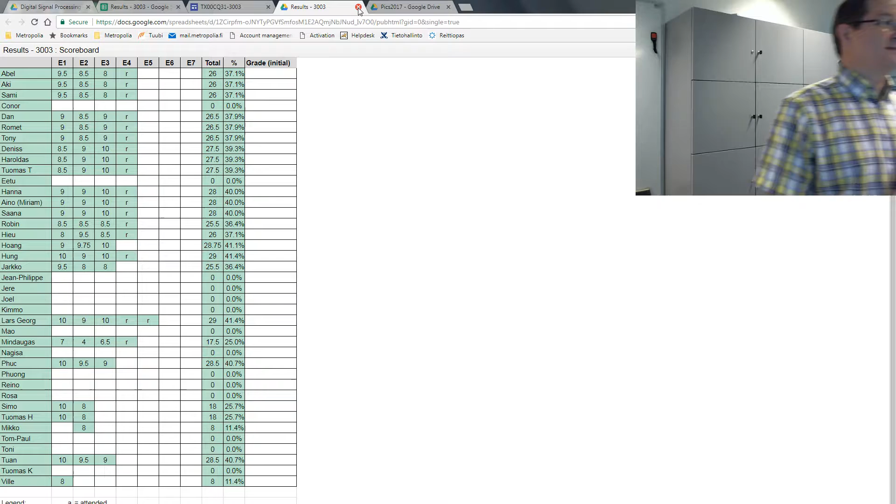Okay, but anyway, back to the business. So control, but before that, let's go through this stuff on the whiteboard. There we go. So what to remember from signals? This is basically kind of review.

Signals. The most important part to remember from signals is that we handle sampled data sets. We have x of t, a continuous time system, and when we sample it, we take the sample such that we have index n, which is just a running number or index, times sample time, which is also 1 over the sample rate.

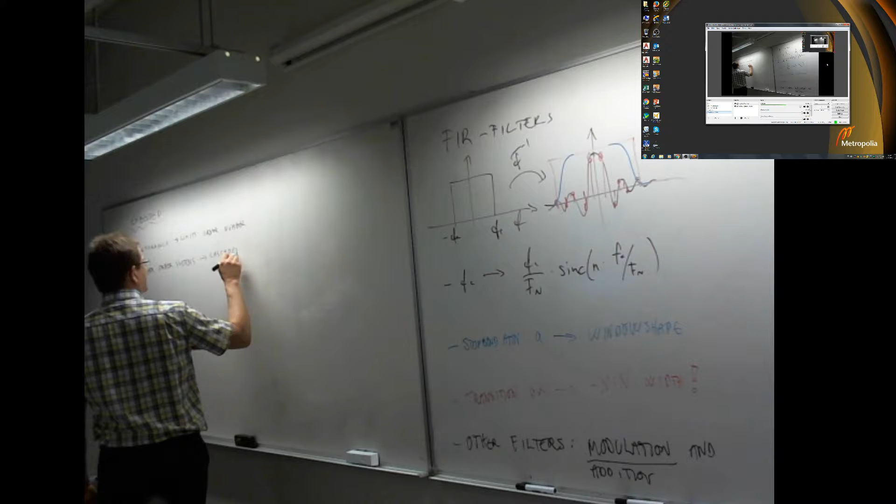And then the calculation inaccuracy actually practically means that the higher order systems are always divided into second order sections. So meaning those will go to cascaded second order sections to actually have good computing accuracy even with limited number of bits.

Okay. And now we can go into, with this quick review, we can go into today's topic. Not that one. It's a system control.

Ooh. Yeah. Yes, it's nice. And it's very expensive. And even more expensive to actually keep it in good condition. It just needed new discs, brake discs on the front, of course, then the brake pads, and then also now it doesn't have any lambda sensor anymore. Who needs lambda? Which means that it's a little bit tuned up. At the same time, it's a lot of fun now, and very expensive to keep in running condition.

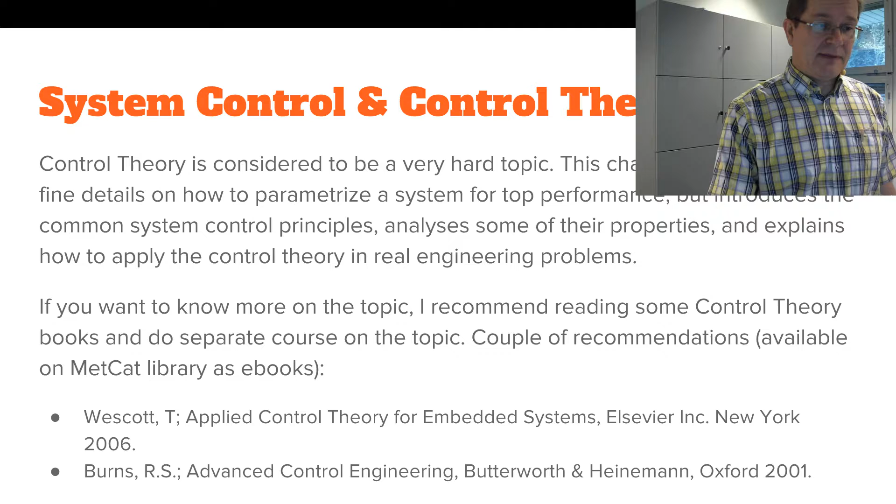And there are actually a couple of good books I found. Wescott, Applied Control Theory for Embedded Systems - yes, it's applied, very close to the book that I would write if I wrote one. It has a very practical point of view, with real life examples, sort of. And the other one is a good review of control engineering overall.

So basically, in control theory or control systems, we have two sorts of control. One is open loop - for example, I wish the temperature in the classroom was set, but I would have no other recourse than that big wish there.

No feedback of measuring the temperature or anything, just sending a command, okay, now do that. The same way, do you have feedback on your system when you're trying to control the speed? That's why it fails. If you don't have any feedback from the system, if you're not measuring speed or position or something like that, you don't know how the system is behaving when you're sending a command.

And yes, very limited control. But anyways, a classic example is an electric block heater for a car, which is just a timer, or actually just a heater element, and you time it externally with your block heater outlet. And then you can also burn your car with that, practically.

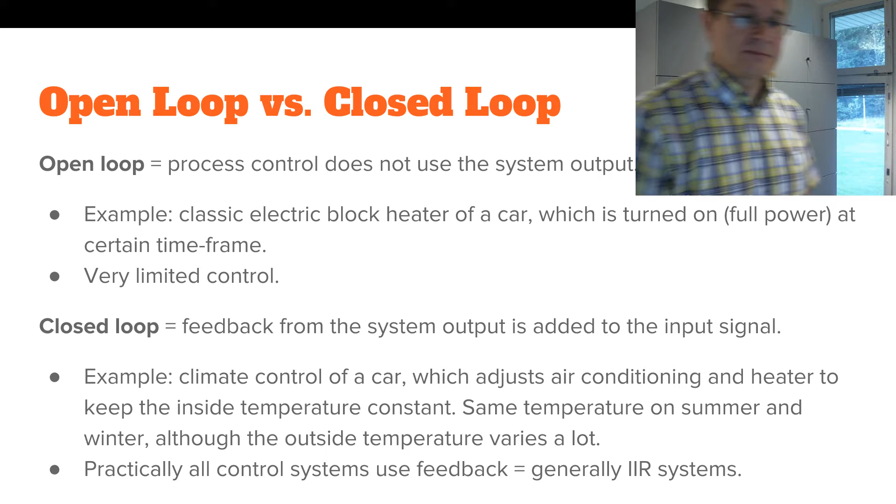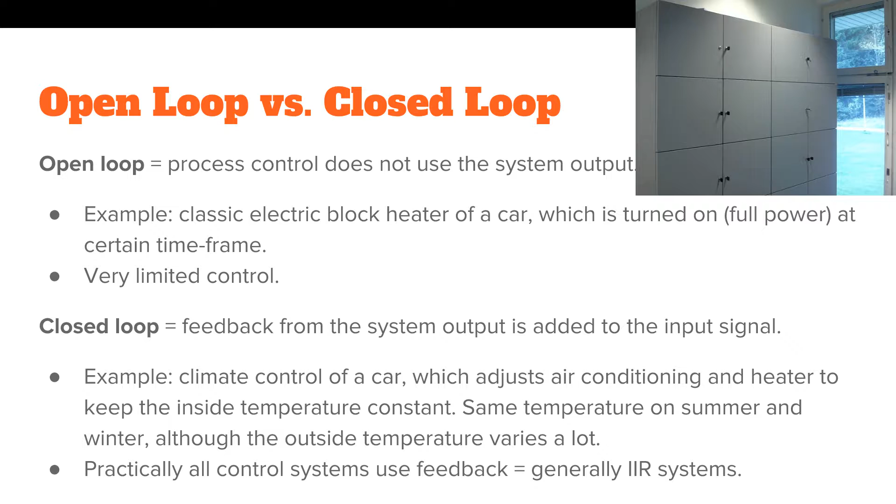Closed loop controllers are the ones which have some sort of feedback - they measure the outcome and try to adjust the system such that it actually gets there. So all control systems which use feedback, or practically all do, are generally IIR systems. If you add a thermostat to the electric block heater, then it becomes a closed loop system - it has feedback, cutting off the power before your engine block water starts boiling.

All right, and that's what a generic... just a moment, I need to check that everything is going to the tube as I wish. Yes, they are. So that's how any closed loop control system would look like.

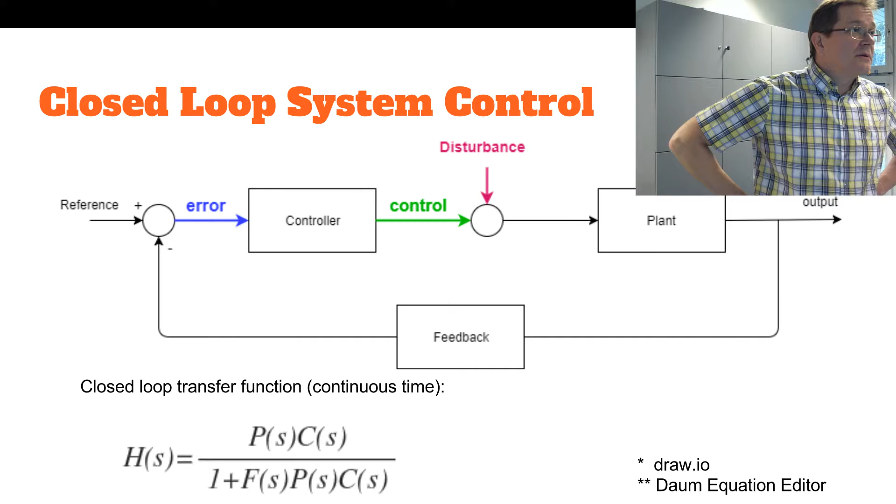So the controller is the one that you would be designing to match the requirements. The plant here, that's an old term from the era of steam power, actually. The term is actually from steam power control.

Those are, by the way, just magnificent things - how they stopped the steam power plants from exploding. That was a small problem at the beginning of steam engines - you could overheat the steam plant and it explodes with a big bang. But anyway, the things done to prevent that kind of disaster, those are just wonderful machines.

So, anyway, we have a controller which has the control signal going to the plant. The reference is actually the value that you would set - so the system should set to that value, meaning, for example, 21 degrees. Then you have a controller whose output somehow directly drives the plant, so it's the signal to the plant.

And in between the control and plant, there is a disturbance signal, meaning that if you have some external effects, they would be calculated as the disturbance to the control signal. Those disturbances are usually inside the plant, but this is how we model it.

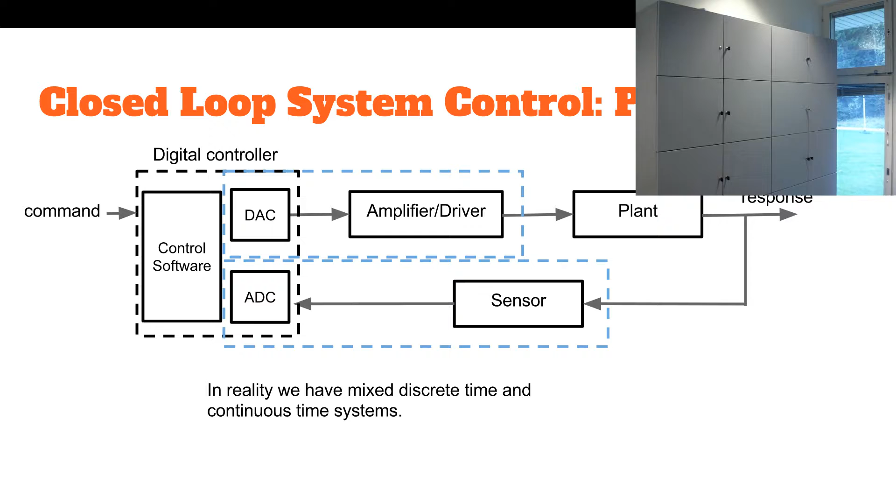So that's fundamentally how it looks like. Some of these are analog systems or continuous time systems, some of these - well, the control - is a discrete time system, and there are some considerations. For example, simply that if you have very rapid changes on the response, you need to sample it fast enough.

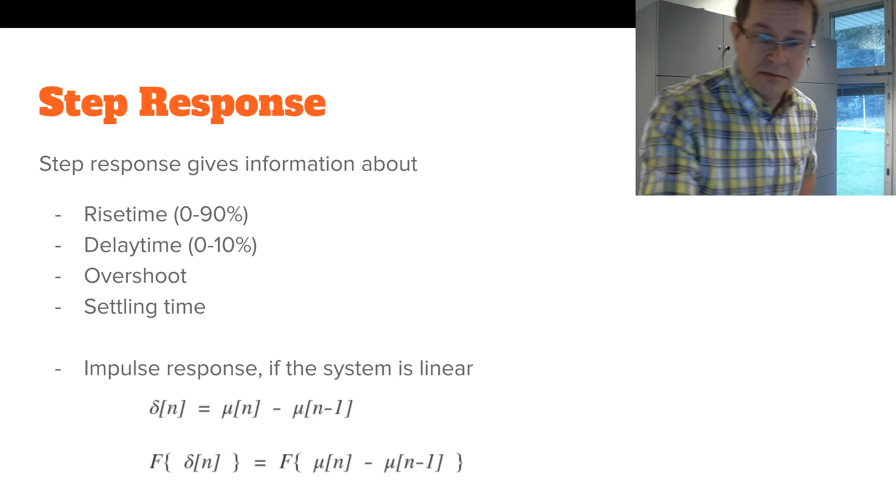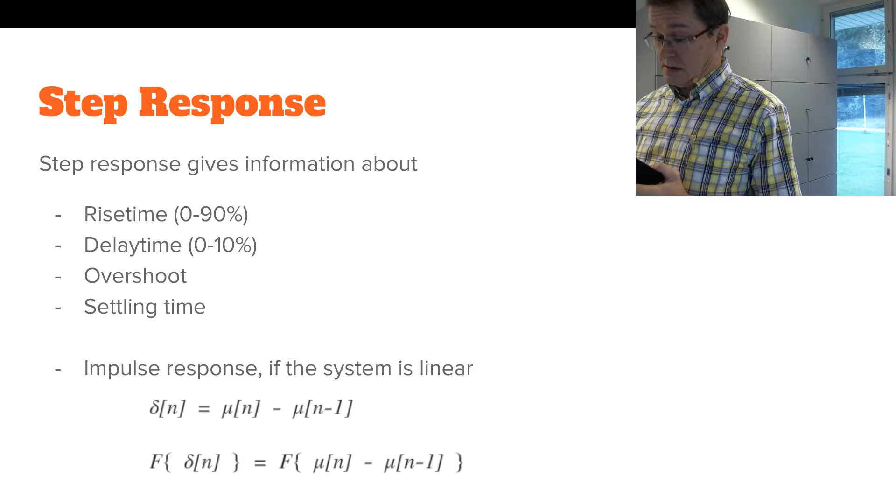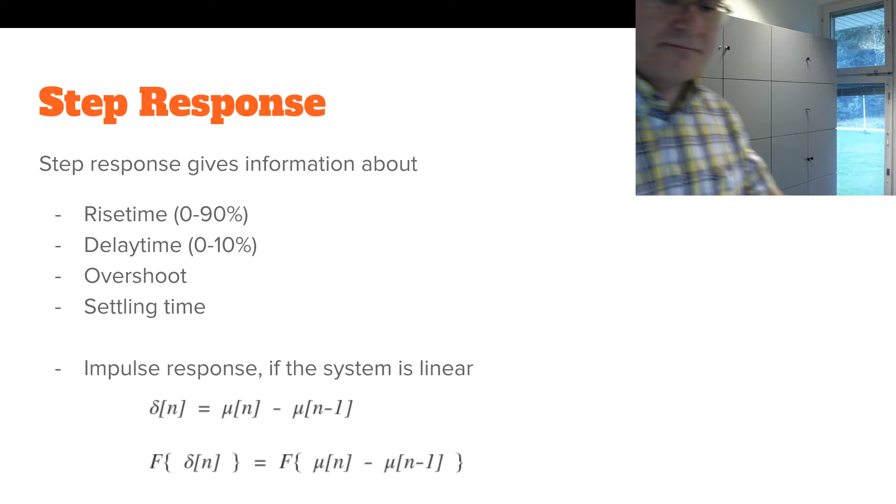Some tools. So we have the first tool, called step response. Just a moment, I'll check which pictures I have. I have that one already, so I don't have the embedded one. The step response is used with controlled systems to find out if a system actually behaves nicely.

Meaning that whatever the system is, you would just send it into the system transfer function and check what is the output. And basically from the output there are some parameters. Generally the output would look like something like that, where let me mark some important parts - the system DC gain.

The DC gain is actually the value where this one settles to. DC, meaning no changes at all anymore. So basically at here and beyond, this would have been settled. This defines the DC gain, when you wait long enough for that one to settle.

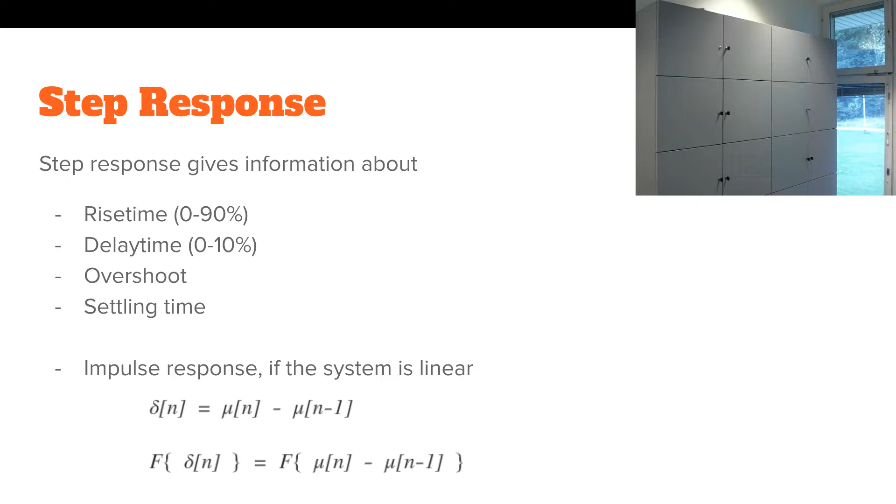Another one - this is probably something that makes hair stand up. Final value theorem. That requires some calculus when you do it by hand. Yes, it does. But anyways, basically this is the fine way of calculating the DC gain of the system.

The final value theorem tells you that you don't need to wait for infinite time to calculate the last value of the system. You can derive it from the Z transform of the signal, meaning the transfer function of the system, the control system loop transfer function. You multiply that transfer function with Z minus 1 divided by Z, and then multiply it by the step function. Then you get the final value simply by checking what is the value of the transfer function when Z equals 1.

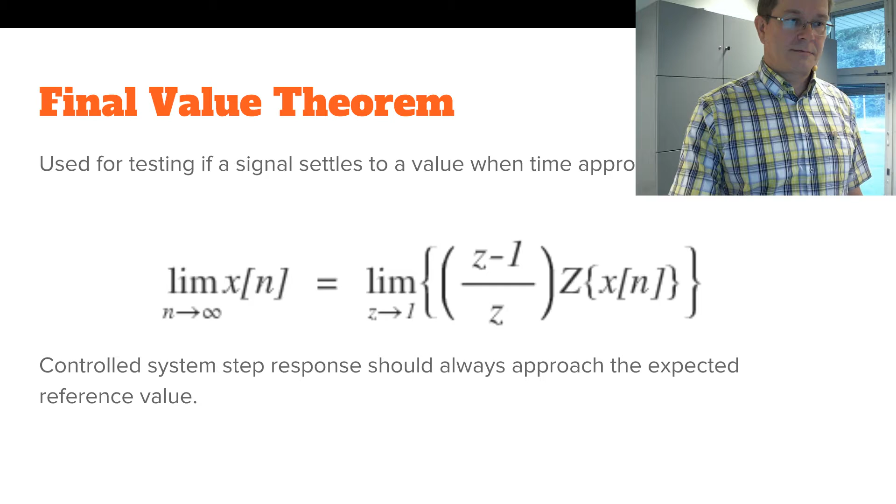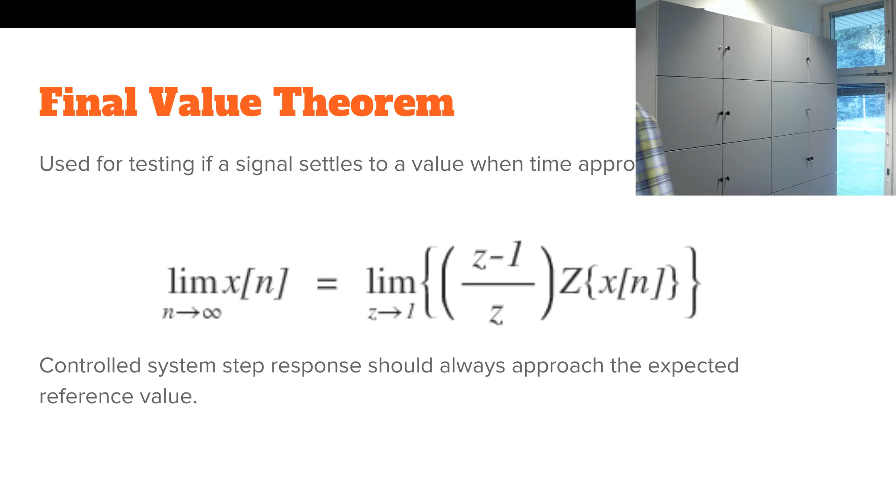There was also a notification that controlled system step response should always approach the expected reference value. Otherwise it doesn't control.

Then you might end up playing with the blocks. We already had this with the filters. If you have two parallel blocks, the system transfer function for parallel blocks is just the sum of the transfer functions. On cascaded systems, that was the way we did this. Second order section division, we had cascaded second order systems that gives exactly the same transfer function as the original. That's how you calculate those.

This is a little bit, well, it's not that hard either. On this analysis of systems, sometimes you need to change the order of summation on the block diagram. So, how to move the plus block.

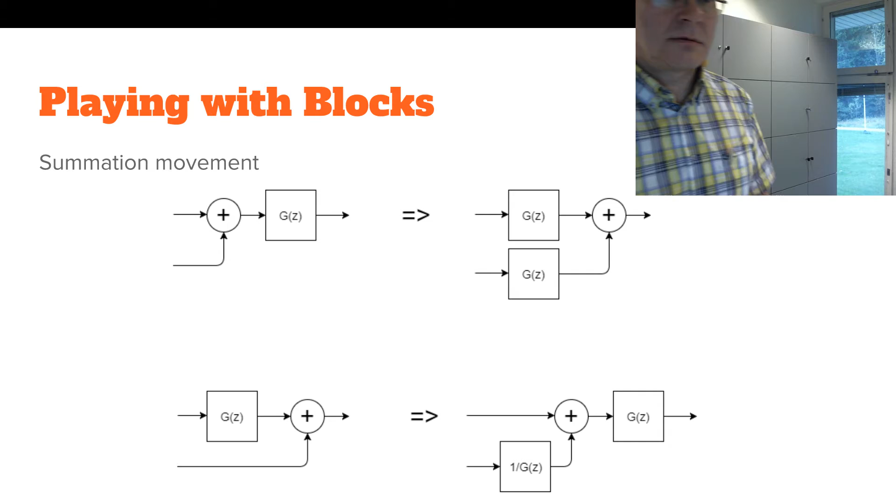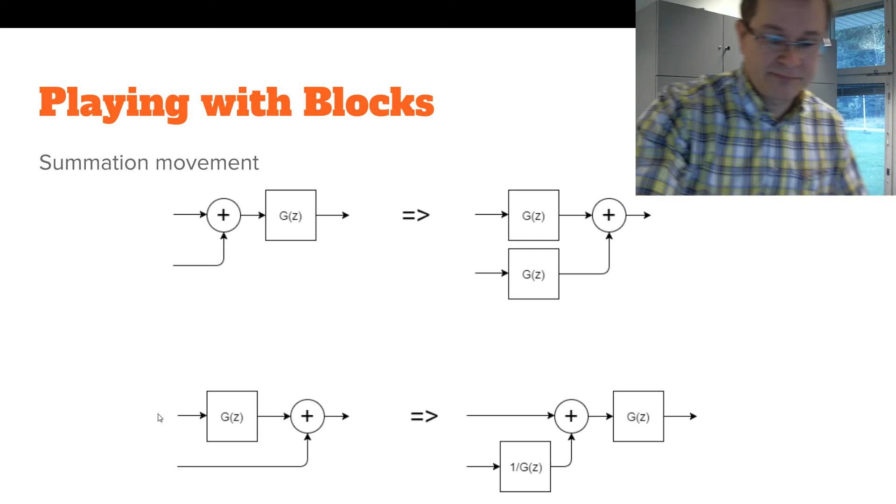The same way, if you had the transfer function only on one of these blocks or signals on the lower graph, you can basically move that one. Let's see if I can do that. I need to take a couple of pictures again.

We had the same thing going on: x1z to g of z, and the summing junction, and the other input is x2z which goes to the summing junction, and the output is g of z times x1z plus x2z.

If we want to have the common multiplying factor like this on the output, we can mathematically say g of z times x1z plus g of z times g minus 1 of z times x2z. So this is the inverse transfer function applied to x2z. If the original was a numerator divided by denominator, this is the vice versa - you just swap the numerator and denominator.

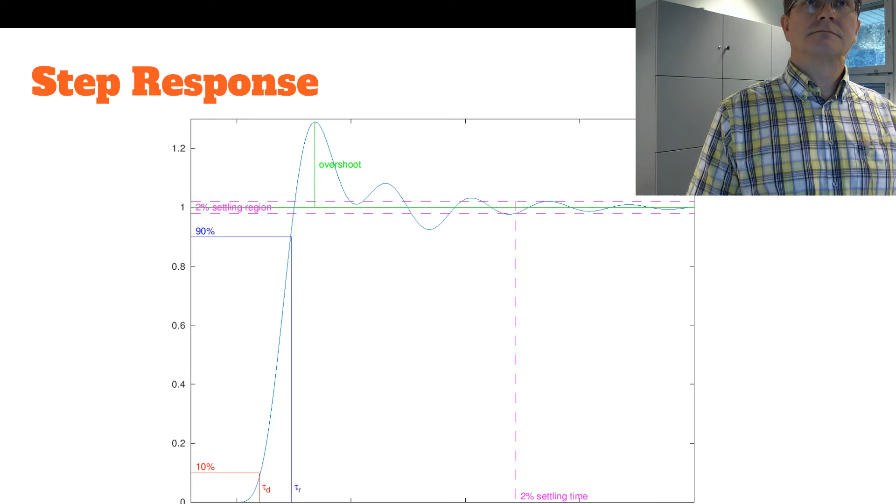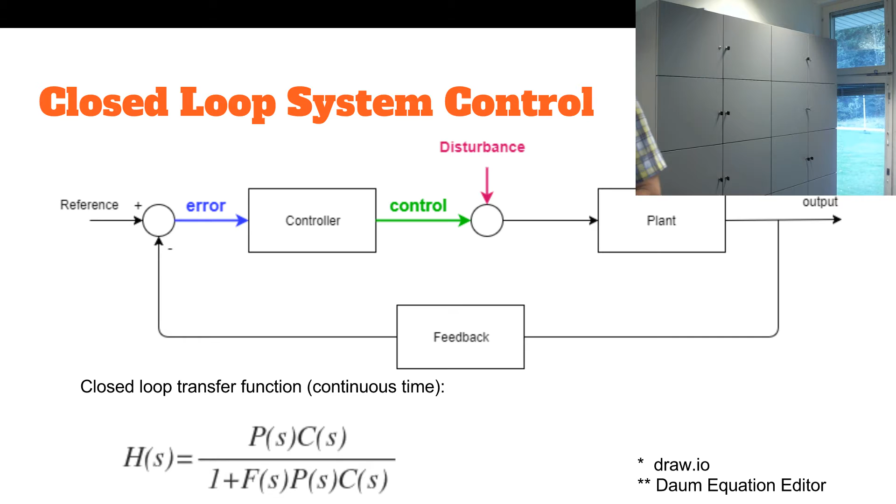Although the systems, any system, usually is quite non-linear. From the control point of view, if you have a short enough time step or enough resolution, then you actually end up being quite linear at that control point. So basically you can make the assumption that for the control point of view the system would be linear, and then the whole control system would behave linearly, which means that you can apply the superposition principle.

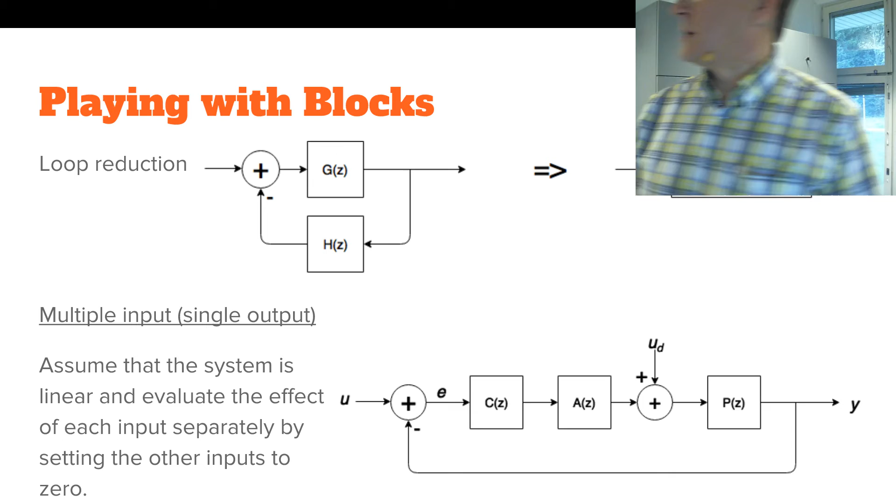Superposition principle is the best thing after invention of the wheel, since now you can actually take each of those signals and analyze them separately. In control systems, it's quite nice behavior, since now you can actually...

So let's see this U. That's just U. Okay, U minus, plus, that's the error signal. Direct feedback, meaning we have an ideal sensor with no feedback, this transfer function meaning that it directly measures what it's supposed to measure. And then we have this C of Z, and this one is the P of Z, not plant.

No, I will take a shortcut on that one. So A of Z, there's the actuator, meaning that in addition to this control, this is usually the driver, which is separate and has its own transfer function. Okay, but here it's included. All right.

That's the disturbance signal, UD. Okay. And then we have the plant, feedback like that. For input-output, oh, that's why. Transfer function for input-output relationship, U to Y, would be the same as in here. Although the GC here is the P Z times C of Z.

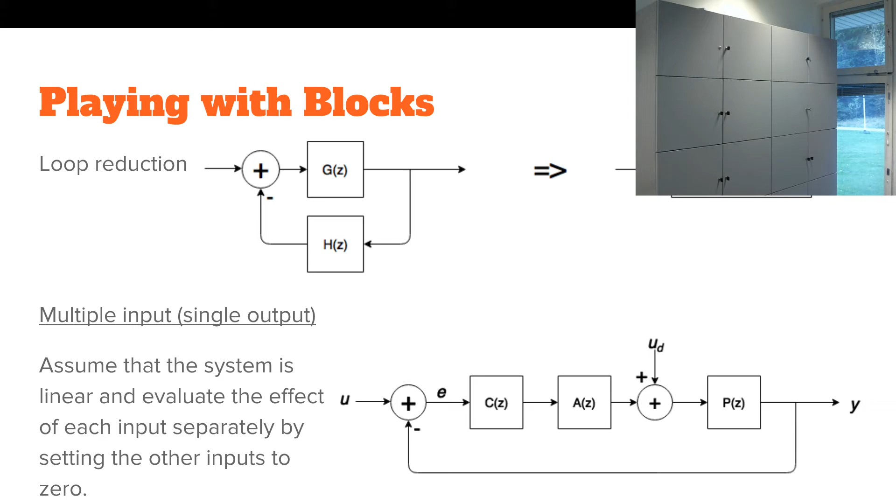So basically, for a good system, the step response of disturbance signal should look like that. As little as possible ringing effect there, and settling as soon as possible to 0. Okay, no effect. Good.

All right. Basically, there are 3, I would call these classical controller systems. So basically, we have PI, or PID controllers, and in some very rare occasion, we actually may have PD controller. Anyhow, what are those P's?

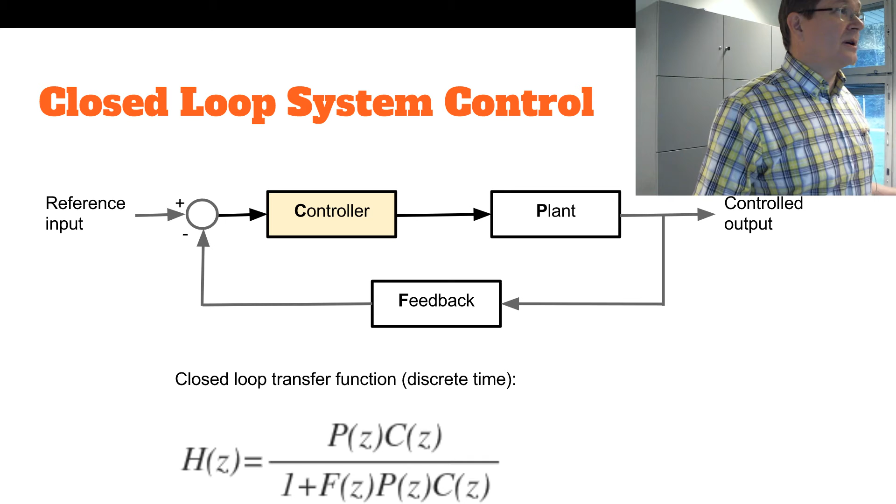Just a reminder of that closed loop system control. That's what we are talking about. And now we are focusing on the controller. Plant is what it is. Feedback on the control output, that's also what it is. Now, what is the controller?

So basically, proportional control is a simple single gain block, meaning that after the reference, there's a difference between control and reference, and you would actually use the control signal which is directly proportional to the difference, meaning just a plain single value. So that's the simplest controller type. You would just feed it into the system, and basically what happens, I will draw you a small diagram here.

What happens for P controller? And for step response, if you're running a step response, and you have this nice graph, so that's your reference value or desired value there, okay, which is also the same as a DC gain, should be 1, okay.

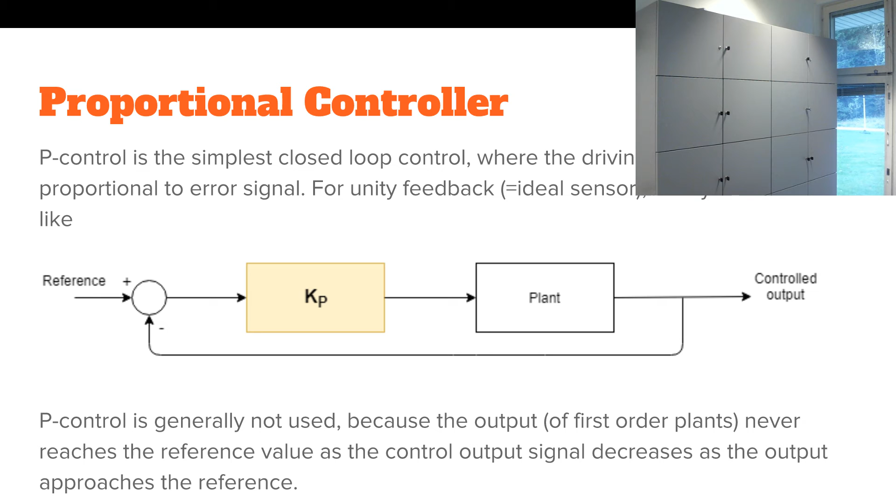The transfer function is a constant, Kp. All right, but this is the most commonly used controller in industrial applications. All right, it's a proportional integral control.

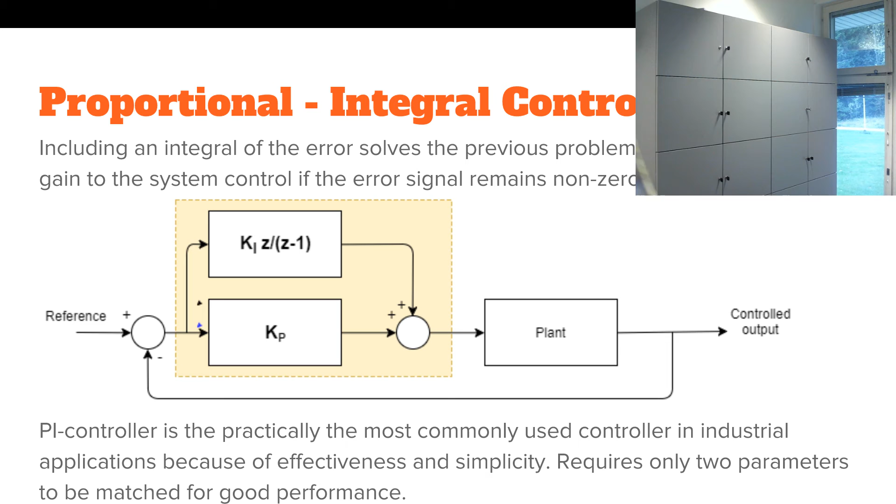Basically, this PI controller, let me see if I can fit all of these three here. PI controller - while this P controller decreases the signal, the error signal is decreasing while we are getting closer. Actually, this one has a smart way of calculating also the integral of the error signal, so that we actually start adding up. So if the output is on either side of the control or the reference value, the integral proportion will grow greater and it starts pushing it more into that direction, closer to the final value.

Okay, so we still have the, so PI meaning it still has the proportional part of the control, but then it also has the integral of the error signal, and that's how the fundamentally the integral is marked.

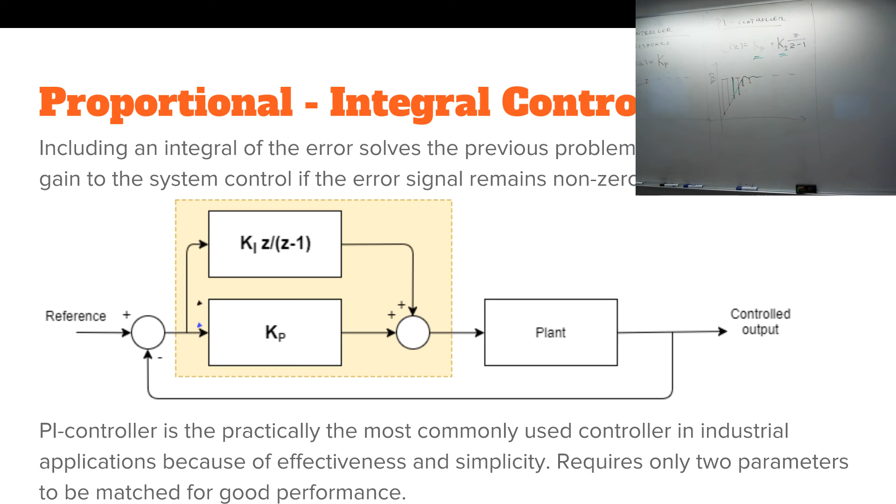Usually this is, say, close enough controller. Although the mathematicians and engineering teachers, they love the proportional integral derivative type of controller, because it's so beautiful. I haven't found any other reason why anyone would like a PID controller.

It actually gives some speed for the disturbance transfer or disturbance effects, since basically this one feeds back some derivative of the error signal, meaning that if the output changes rapidly - and it usually changes rapidly only because of the disturbance - since you have all the power to run your control not just step but also with the ramp, so you can stabilize the input for the system, but you cannot do anything for disturbance of the system.

So for highly disturbed systems, which basically are, say, industrial applications where you have a very demanding system which has some of these systems very closely related to others, so one system's start will cause also something else for the next system - for that kind of complex system you would need PID. But for example, on those motor controls you are playing now, PID would be overkill, since you do not necessarily have external disturbance there.